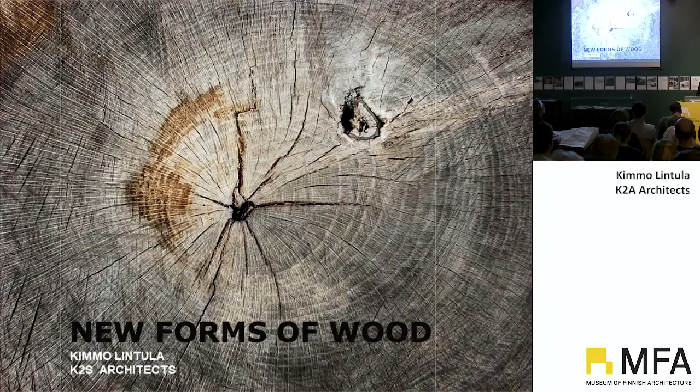I think a few words about timber itself. As we noticed or saw there, you can do pretty much amazing stuff from timber, and even deliver quite amazing spans of timber structures while using just a normal truck and a couple of other wheels. But this is just one of the benefits.

I think the big thing about timber is that it's really kind of like renewable energy in a physical form. So it's something that's grown from the sun and from the earth, and there it is, and it's really renewable. It will regrow, or it can be replaced by another tree. In that sense, I think forest is kind of like the manifestation of a green miracle, you could say. But as a material as well, it's very human.

It is kind of like one that creates memories, but also something that records memories. If you look at this kind of cross-section of an old tree trunk, you can see how it's recorded, the different years it's been growing, the different conditions of water, coldness, warmness, weather in general, the harsh winters, hot summers.

And of course it's very appealing to the eye somehow. It invites you to touch, and it reacts nicely to sound, and it's kind of softly seducing you even by its own fragrance. So there are plenty of reasons to do things in timber.

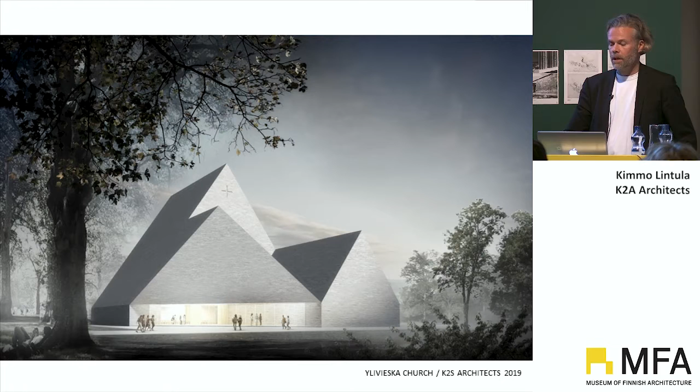So another issue here is that we wanted to return to traditional building physics, meaning that we build solid. So everything is single layered, whether it's stone—I mean brick here—but then the timber is also a single solid timber construction, mainly out of CLT, cross-laminated timber. This is to give it endurance for several hundred years, and also predictability of how the building physics really work there.

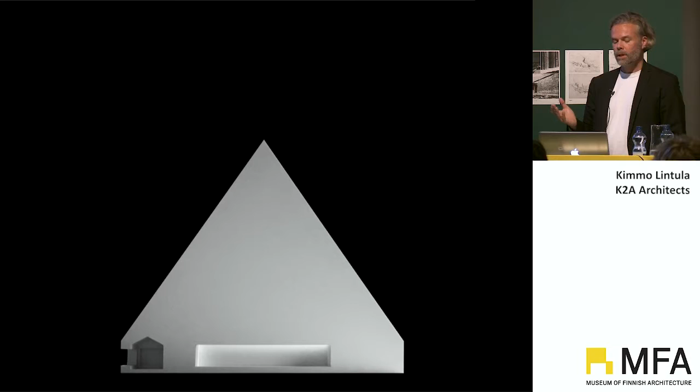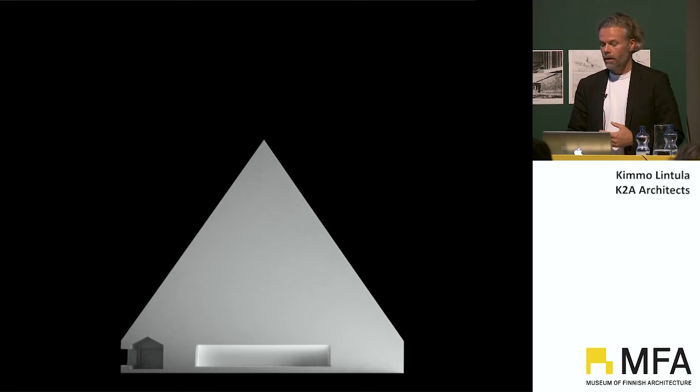But of course, architecturally, it's really inspiring that you kind of go back to the times where you can make just a very embracing mass, and then dig out some places for people to be in there. And structurally, that means it leaves it pretty much open unless you just take care of the outer surface and inner surface of the spaces. Everything behind or within the mass, as long as it is solid, is quite free of design.

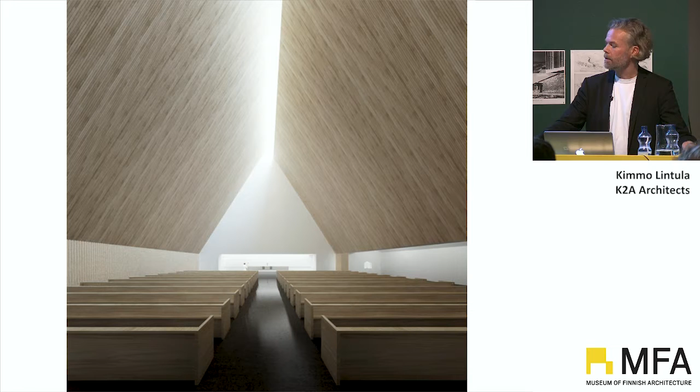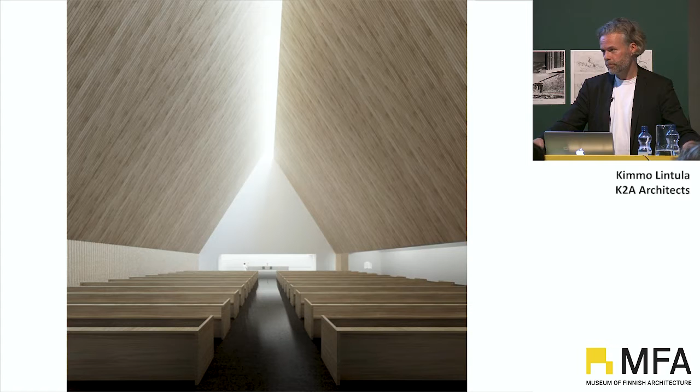But then, as you see it inside, can that be challenging, or can that be kind of complex? I think it can, in thinking of it, because if we think how it's normally done here, which it will probably be realized by, and I have a comparison of a bit more further engineered ideas, how it could be also.

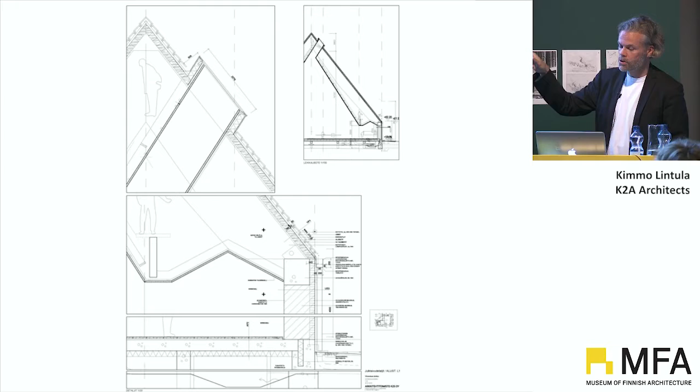This is the first time in Finland that the CLT plates are used as one unified plate in order to strengthen the structure and also take the loads and take care of the stability.

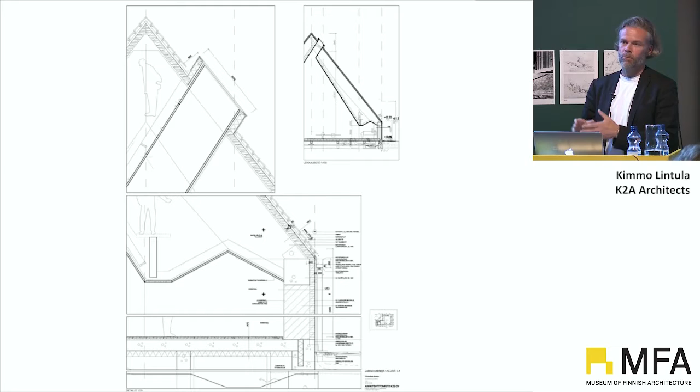But could this be taken further still? Because usually, as we were discussing before entering the hall, in Finland we are in a state of timber construction where you take care of the forces that come down with one solution, then you have another solution for reinforcement, then maybe a third solution for some other layer. So it means multiple layers, and maybe a combined selection of products, and a combined selection of engineering details, whatever.

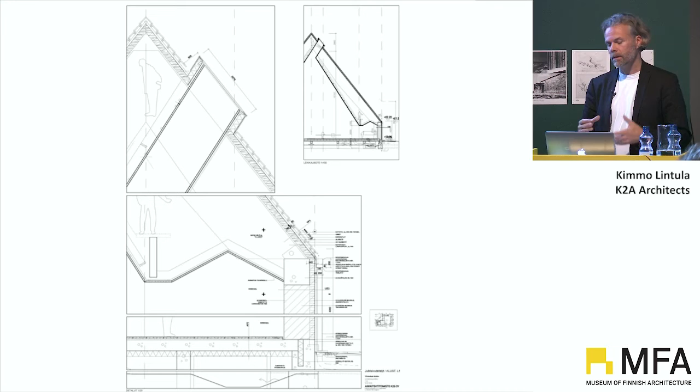So we had a chance, this was done with the ministry, to visit Switzerland for a workshop in order to create this bridge of knowledge between Finland and Switzerland, to raise our level of engineering and architectural knowledge on how timber construction could be made.

It was a really eye-opening event. We had a one-day workshop there, and then they had two weeks of workshopping by themselves, and then they came up with the concept and presented it to us. If you compare this to the traditional way, it's quite obvious there's a lot of knowledge behind how things are produced, how they can be assembled at the site, and how the loads go.

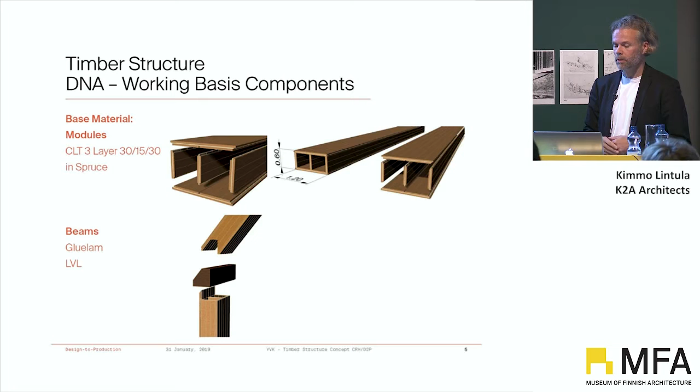So all together, it's really a multidisciplinary solution for very complex systems with a very simple solution, which is just one hollow box, a prefabricated module, which can then take care, when rightly joined, of all the loads, all the stiffness, all the movements, everything like that. And of course what you really need to know is how to do the connections and joints in order to take care of the loads.

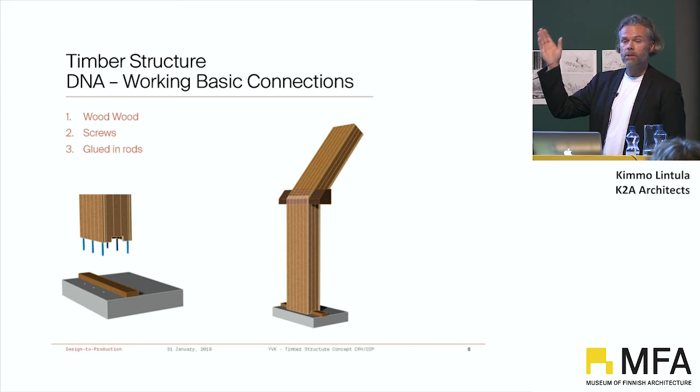But that was also handled there, and as you can see, everything is really neat, everything is really pure, everything is in line, everything is very Swiss, you could say.

This is how it looks in a section, the hollow tubes go from the roof to the walls. And if I remember right, after production, this would have taken less than a month to put up, so it's really fast as well.

So there are things we can go further on here in Finland as well. As Johannes said, this is a really nice opportunity when you can see something being done abroad, then you have the persons responsible for that, and you can exchange knowledge and be open-minded about it. So I think gradually we can reach a high-tech level of building timber construction here, which means you can have low-tech outcomes too, meaning material resources used wisely, and time used very wisely as well.

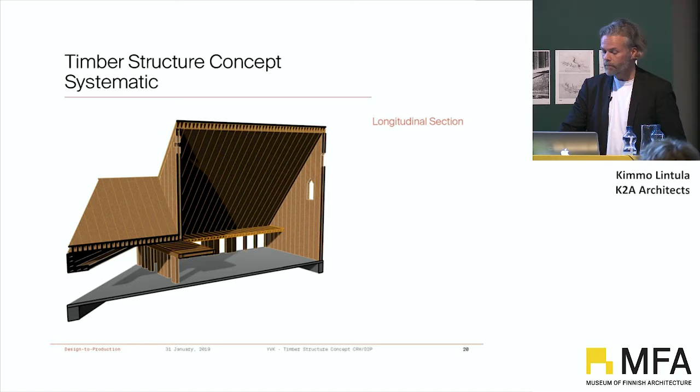Our architectural firm actually started with the Olympic Stadium canopy, and I wanted to show this because it's a very complex geometry, but it was done after a very complex process that was also quite fast, resulting in a very simple form and outcome.

This was a competition as well, and we thought about different options and went along with a form that is very flat on top, with a kind of undulating surface that always meets the corners or edges at about 40 centimeters high. So the shape is always the same from the edges.

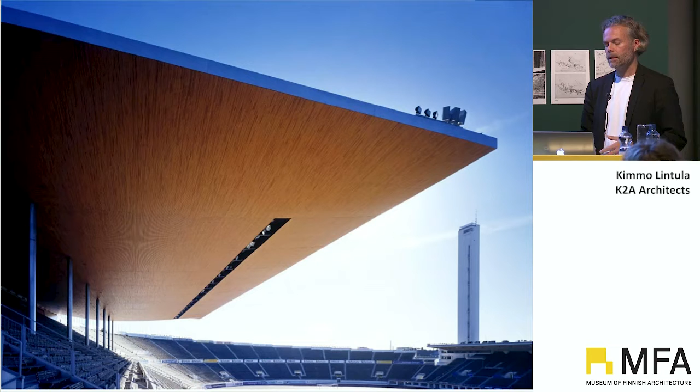Probably one key reason we won the competition was not the form itself, but that we cladded it with wood. Timber has always been part of the heritage of the Olympic Stadium through its various changes over the site's history, when it was enlarged or had temporary stands. There was a historical connection — even the benches were timber.

So what that meant was that, as we saw in the distillery as well, the main structure here was actually steel, because the spans and the possibilities of anchoring to the existing structures couldn't succeed with timber. But timber is what you see — it takes care of the cladding of the shape itself.

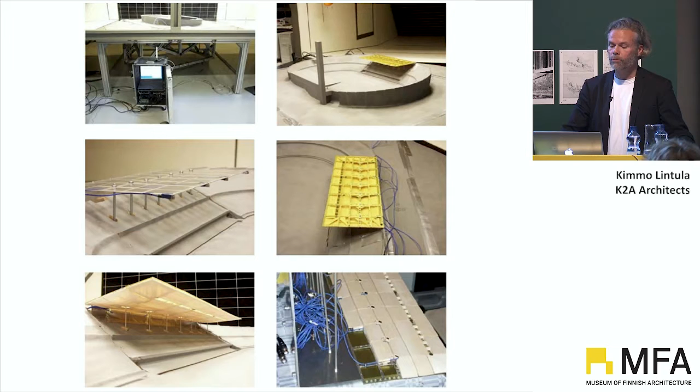We went to the wind tunnel test to find the right geometry, investigate its effect, understand the forces and structure, and then it comes down to the details.

We did a lot of one-to-one study cases, because it needed to be prefabricated, since we knew the construction time was pretty fast.

We wanted everything integrated — all the installations needed in the stadium canopy, like lighting and loudspeakers — to be part of a continuous surface without any interruption from these technical elements. This shows our tryouts and ideas for integrating them.

Scale is always important, so we considered how to create this big-scale surface out of timber while achieving certain quality. We realized it's possible with industry methods — you can use the worst possible quality of timber if you cut it into small enough pieces to remove the branches and bad parts, then use finger joints to create wood as hard and structurally tensile as solid timber.

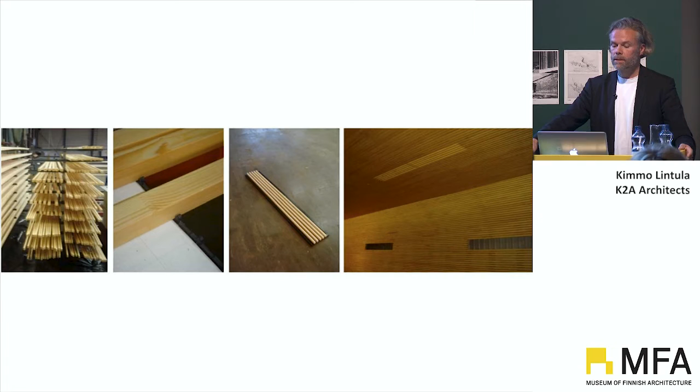We also layered this in 3 layers to maintain stability against moisture, so it doesn't twist. This was our first attempt at what we called future craftsmanship — the idea that you get the quality of craftsmanship, but it's industrially produced.

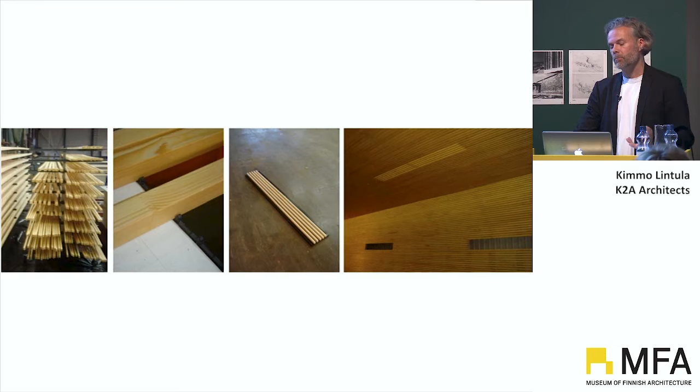Then you have to account for the width of the prefabricated pieces — here they were about 12, 12.8 meters long, with pieces roughly 1.2 to 2.4 meters. When they were put into place, it was like using canvas — even though it's heavy and very materialized, it's actually quite flexible on site because of the dimensions.

So we were able to create this unified surface which met the challenges of geometry, and this was all prefabricated. Now we're back at the crime scene, so to speak.

We are just finishing the project — the refurbishment of the Olympic Stadium should be finished next summer. It has extended in many directions, as you can see, including to the curved parts of the stands, and also on top of itself to achieve longer spans for the columns, so we won't disturb the spectators.

And then you can see the effect that in the original one, in the eastern part, there were seven columns, and now actually we can do 5 here at the south and 6 on the north, which means that the longest spans are about 36 meters. But then, of course, the structure is not the issue here, because it's again a steel structure for the same reasons, continuation of the old one.

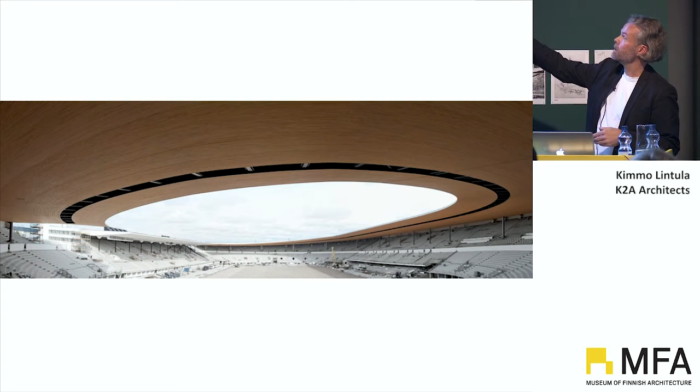So of course, one issue is where do you start? We decided that you always have to start in front, because that's the thing you can actually conceive, and you can see that those lines, if they are not working very well or they are ending next to the edge, then they are visible. So the black cut in between there, which takes care of all the installations, that was the place to hide the non-continuous strips. And then again we have another starting line in the back of that strip, and then it goes to the back of the stadium itself, where you can end it how you want, because the geometry there is changing anyways.

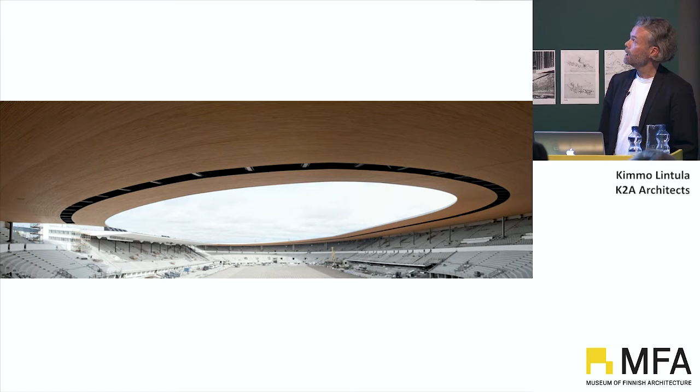But then the other issue was whether it should be prefabricated or not. We had a lot of discussions and tryouts with the prefabrication, but because there were so many geometries changing within even one prefabricated plate, it was decided that the unit we use here is a 5.5 meter long strip of this wood, and that's it.

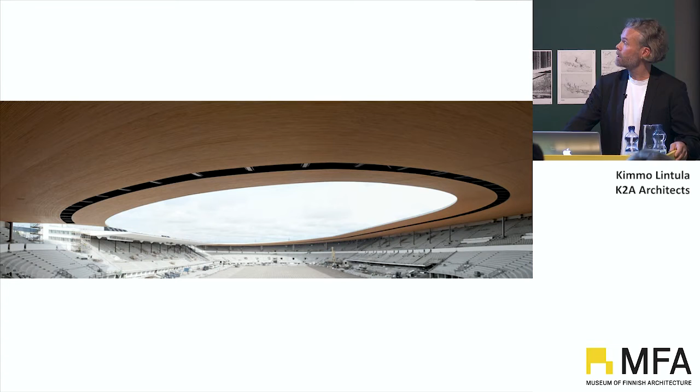But then there's another complexity here, which is that it has to take care of the fire issues. The original one was sprinkled, so there was a system for that. But then, of course, if you think about winter use and water, they don't go very well together, so the client did not want to have it sprinkled anymore. So we had to find a solution for treating the timber. One option was to paint it somehow so that it's fire resistant, but the trouble is you probably end up painting it every 5 years, maximum, mostly every second or third year.

So what we found here was that we had a series of innovation meetings where the timber production people could come to us and talk with us. And then we found this stone wood, a kind of timber which is impregnated with the ingredients of stone itself, which stay firmly in the cells of the timber, meaning it will last 50 to 100 years and won't burn. It needed a lot of processing in order to come up with that.

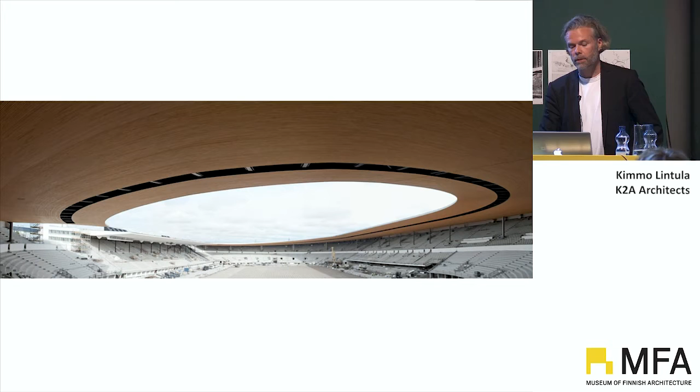And then I think what we have redone there, we've achieved an even better solution, because when it's done at the place, you only have, let's say, 5 discontinuous lines, which take care of the movements from moisture and heat. So that was a learning process for us, how to do this kind of cladding in a very abstract expression, but still technically working and being cost effective enough to be realized.

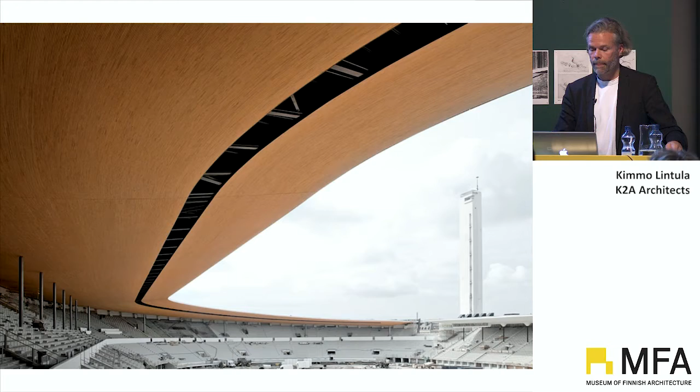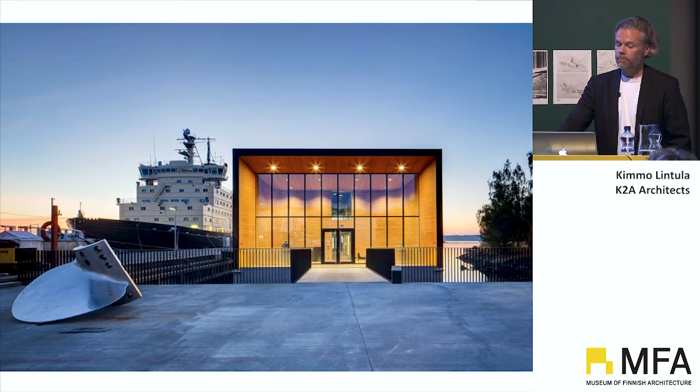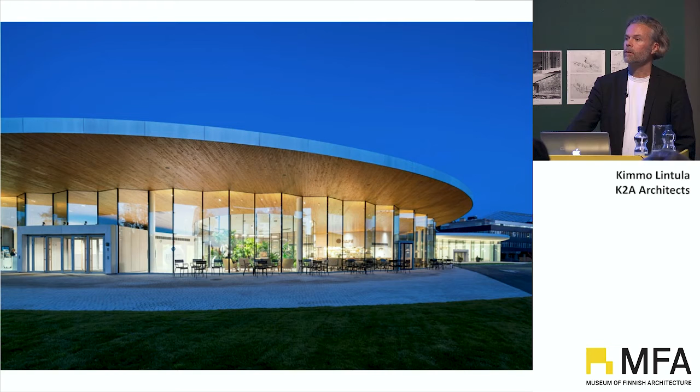Then that study line has continued on. This kind of cladding has been exposed to the shipbuilding tradition. We've used it for marking a public building for the community in Maunula, and it's also been hovering on the visitor center of Fazer. So it's been used for branding as well, but in all of these projects we've been able to use some of the knowledge, or go further with the knowledge, that we gained from the Olympic Stadium project.

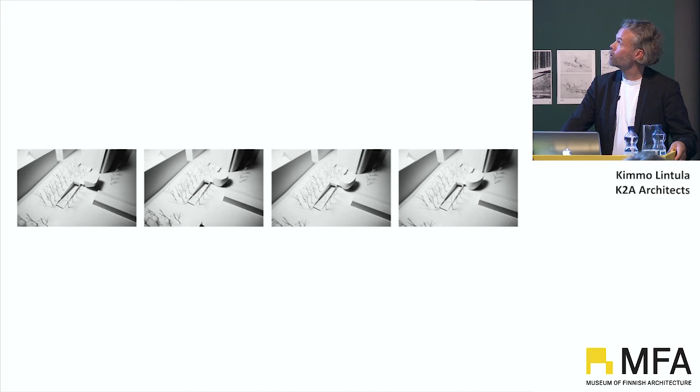Then I will take you a bit further, to a project that actually has a really complex geometry and complex content as well, which is the Kamppi Chapel.

I wanted to show you that the process started, it wasn't so clear how it will actually appear at the end. So we had a lot of tryouts with different models of different versions of geometry. It was stated by the client that it should be timber construction, a place for silence, with some meeting rooms for social workers or priests to meet, and the rest was pretty freely up to us to come up with a solution.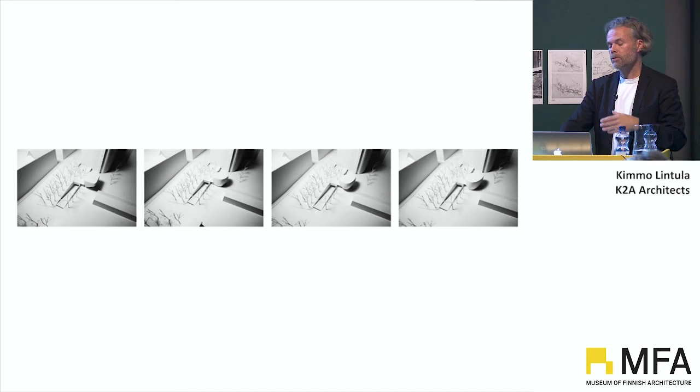The place in Kamppi is really tricky because there are height differences there, and a lot of big people flows going into the metro station, coming from the railway station. It's the most commercial place in Helsinki as well, so how to do a place for silence there was a challenge.

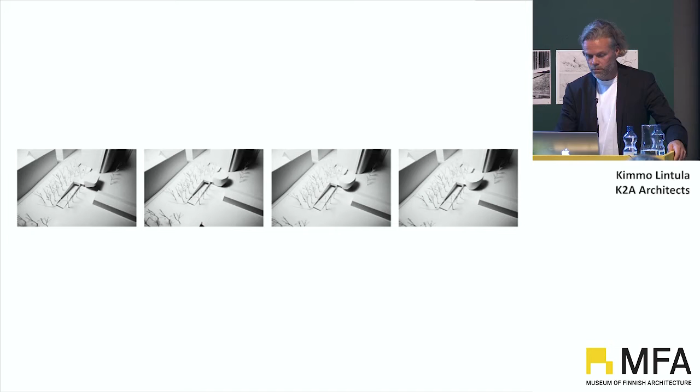We thought that we should somehow create a form that comes out of that context - a place for silence, for material and light - and that allows these people flows to pass by. It also allows the eye to pass by; you see it there, but it doesn't block your views. It was really important that we wanted to make it real wood on all the surfaces, with the abstract intention of bringing something different from what was existing there, which is of course glass and stone and metal, usually found in commercial architecture.

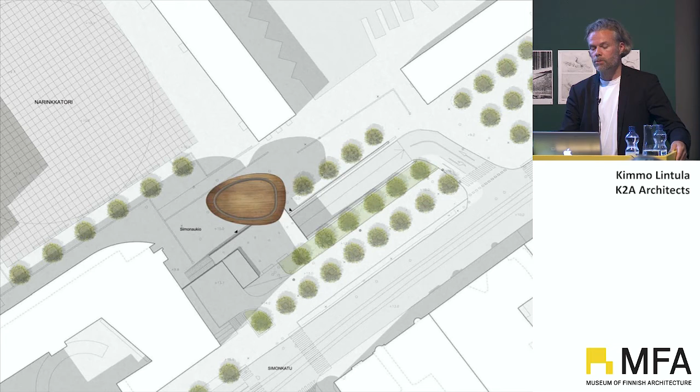It was partly built in situ, partly prefabricated, and I'll show you how. The main concept was that all the additional or service spaces we needed are put next to the ground, as a continuation of the ground or the height difference you could see there. The real thing that you see is only the chapel itself, and its form covers itself from the outdoor noise, and is visibly strong enough to withstand the weight of the very tall commercial buildings.

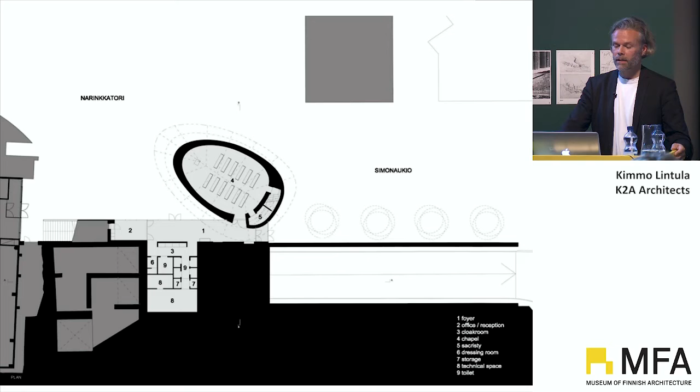This is the size of a single family house - altogether like 350 square meters. So the tricky thing was how to do that in timber and not make it look like a single family house, because that would not have fulfilled the criteria.

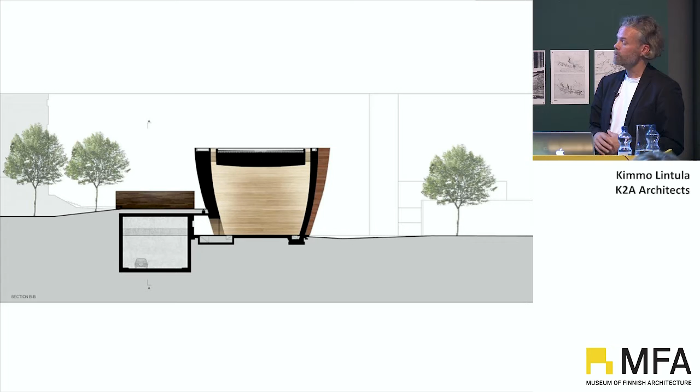The concept itself was quite clear: we needed to make a shape which covers itself from the outside noise, takes in light as much as possible, and is a place for silence where only the material is present. This section gives you the idea of that.

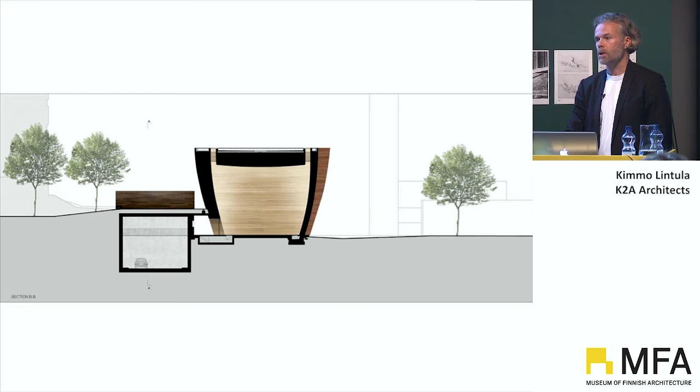All that is black in there, even with the timber construction. This is a similar situation to what we have now in the Ylivieska church - all that was a free playground for construction or engineering, figuring out how to do that.

We had several different rounds, but one important issue for us was that, since it's very small in size, the expression or impression you get from it should be really abstract. We thought it was important that you don't pay attention to one strip of timber, but to the surface, the whole form there - which meant there needed to be quite a lot of lines.

We did different scale testings, and then the next question, which will come up a bit further on, was how to make every line horizontal there. By doing these drawings we were not aware of how difficult it could actually be.

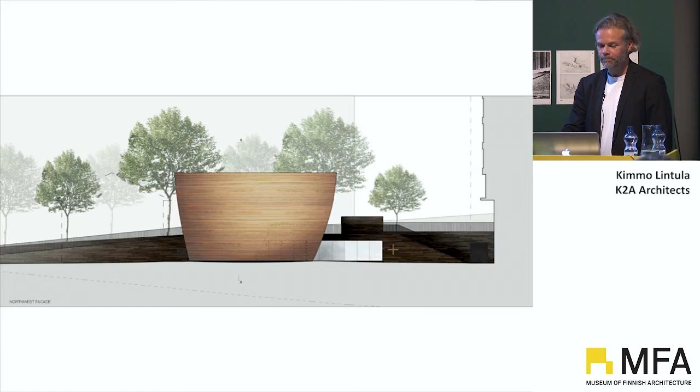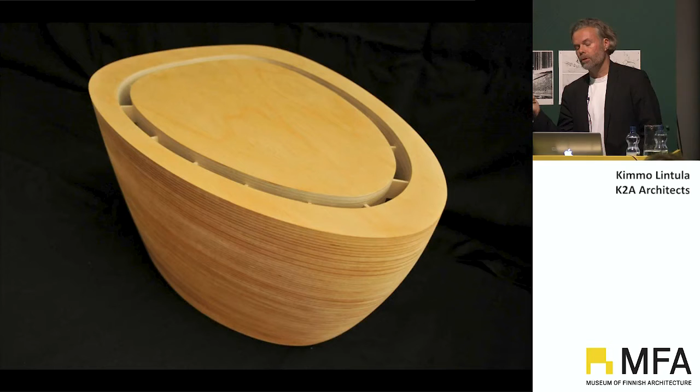We fine-tuned the shape within the context, made some changes to the orientation, and those models were at 1 to 200 scale. Then I think it was really important we jumped into the 1 to 50 scale, because that's almost the scale of actually building - the building comes out of the context.

You should never do it as a design, but there are moments where you have to detach and take the form of the building itself into an abstract idea of just the form. This 1 to 50 scale model was actually very helpful in that, because it was made out of plywood glued on top of each other, so there we could reach again the same tactileness on the texture that we wanted.

So it's always important to keep the goal present there. The lines were again important, and this showed that it's possible to have this always differently curving shape and still the lines are going straight. But also the whole shape of it, we decided for reasons like we saw there, that if you want to protect itself from water and stuff like that, it should be something that always grows and protects itself, and you can't detect those shapes without making a real model out of that.

And we redid the design based on this model with some corners. But then of course the shape itself started to reflect that, and we started to discuss how to do the cladding itself, or how to use the timber.

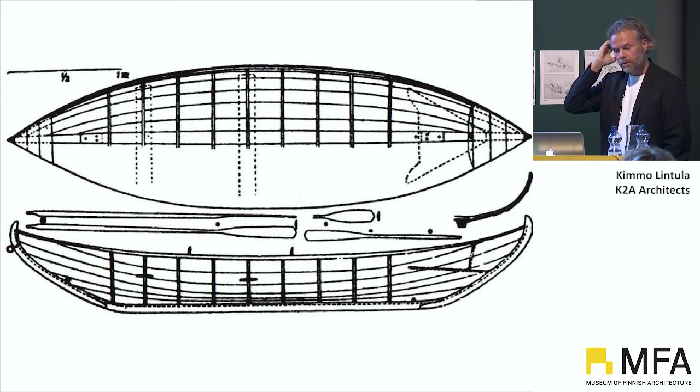And then of course we started talking with people who were either connected with the timber industry, or who were really craftsmen of timber, like carpenters. And then of course this traditional boat came up, and if you look at the layout of the traditional boat, it resembles a building.

But the part is there actually that while the lines start to follow the geometry, it means that to make that thing you have to cut each of those boards in different forms, and that we realized.

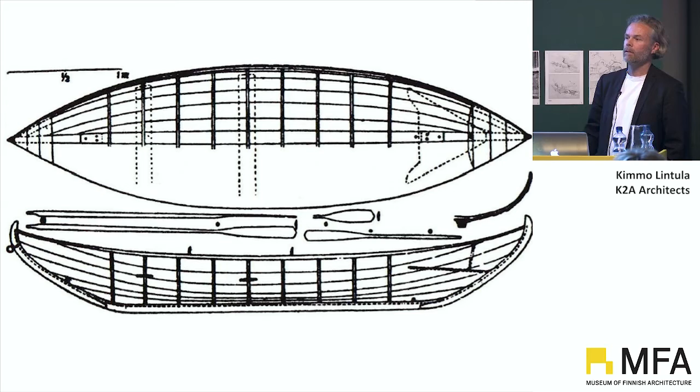And then if you think about the layers of lines we had in there, we thought that maybe the scale should be that if we use this height of timber, it means it's kind of like the single family house again, because that's the scale they use there. So we had to do something else.

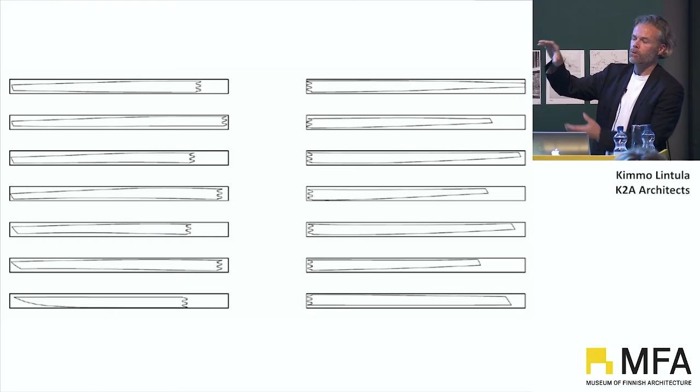So it had to be this kind of visible dimension. And then if you think of reshaping that kind of dimension, with hundreds of layers of those, we realized quite soon that this is not the way to go.

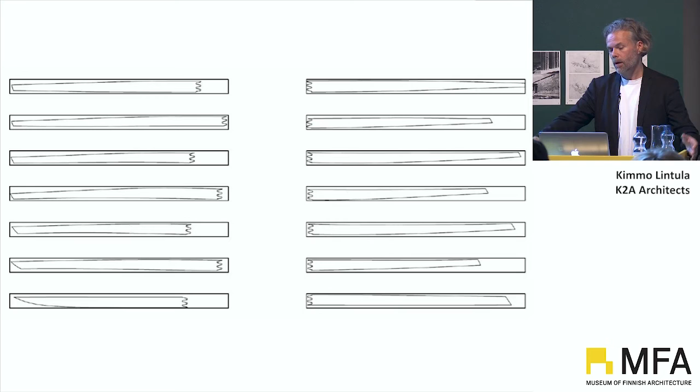What can we do? So then, as we saw earlier on, we also had some geeks in our office, luckily. This is just Greek to me, but of course I understand where it comes from, but I cannot actually make this. The next one, this I could even make maybe.

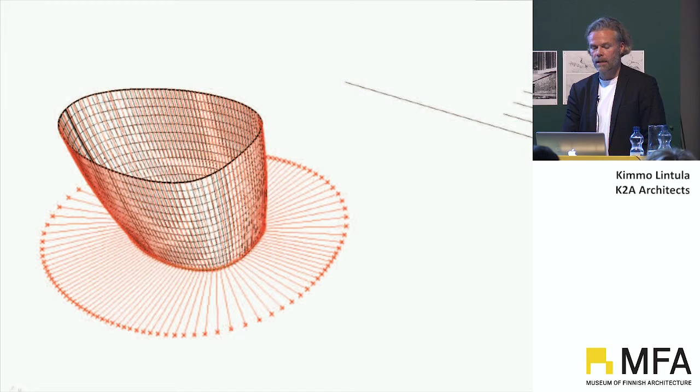But then we had this geometry in a BIM model, which was helpful in many ways, but then we had these surfaces of the inner surface and outer surface and things in between, and of course then we made this diagram of programming.

And the programming was used to cut this shape into vertical slices every 600 millimeters, because then we realized that if we don't want to reshape the horizontal lines, we have to make the vertical lines individual in order to be able to use just standardized horizontal strips.

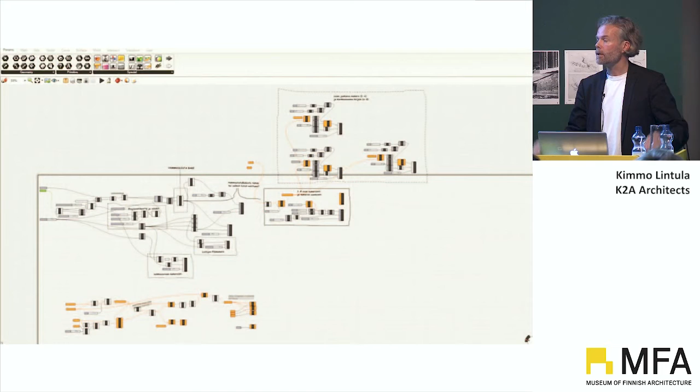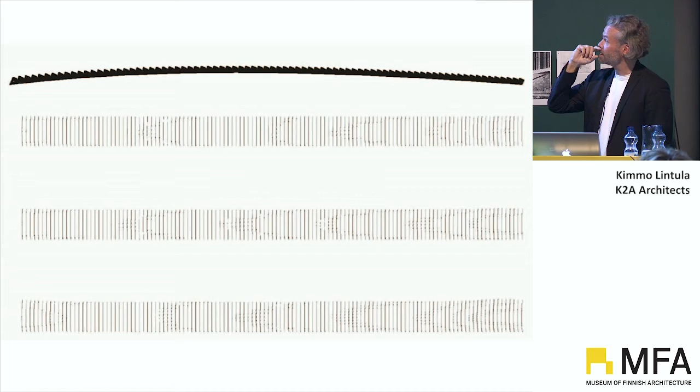So after that, this is kind of like a notation or the graphic that we got there. The idea is that each of these vertical secondary structures, which are then just used for installing the cladding, are different in their shapes, different in their radius, but also the cutouts are different because of the directions they are facing.

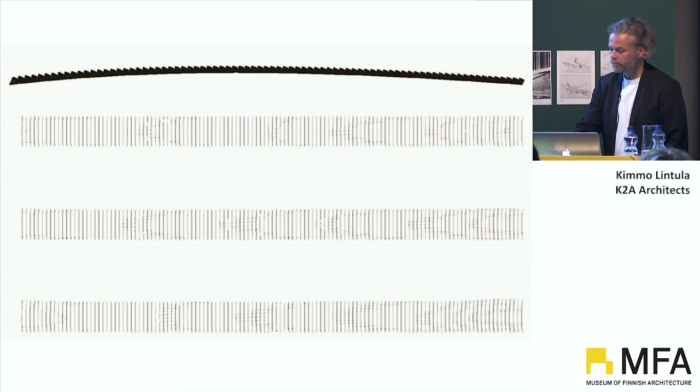So that took care of the secondary structures. Then there was the cladding still, and based on the experiment that we had early on, we very early on decided that we will go again to this three-layered glued facade material.

We think about what kind of timber can we use, whether it's spruce or pine. Then we went for spruce because it's actually pretty much moist resistant and acts better in the facades than the pine that we found out. And because it was industrially produced, we could get high quality spruce out of non-quality spruce actually.

But then there was still this issue of how to organize the cladding so that you don't have to spend half a day just thinking of how to do that and what kind of timber parts to use. So we used computer study cases, where the redder it gets, the steeper the radius is.

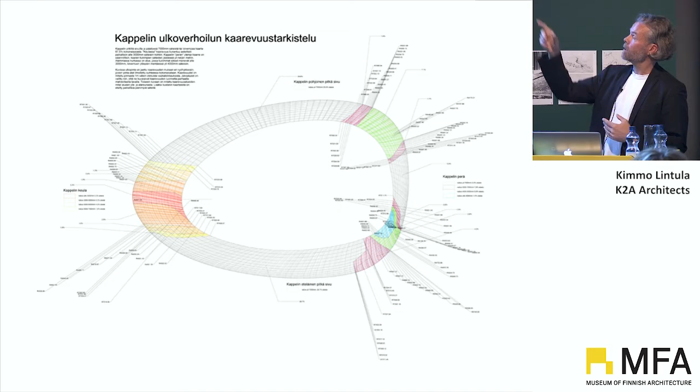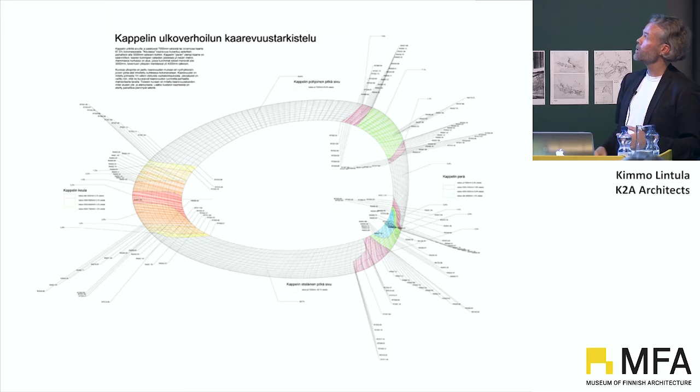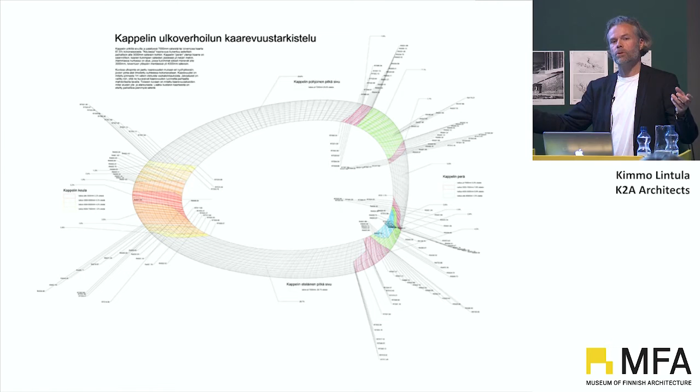Then these are easier ones where you just follow. But of course, we had learned in a stadium project that when you make them long enough, it's almost like a wire, so you can pretty much bend them in each direction. It was based on that.

Then there was still left how we should actually make the cladding itself. Here you see the section of the wall construction - it's a multi-layered construction with a different section shape to take care of the noise. That means you have a different width to the wall, so it takes out different wavelengths of sound. It works pretty well for outside noise.

But of course, while you're in a chapel, you want chapel-kind of acoustics. So you really need mass in order to get your voice echoed back, to get feedback from your own voice. That's why this massive common alder, free-floating inner core is placed there, which is the visible chapel itself. The outermost cladding behind it is like a raincoat - a very heavy raincoat used in weather-exposed buildings that could have been left exposed.

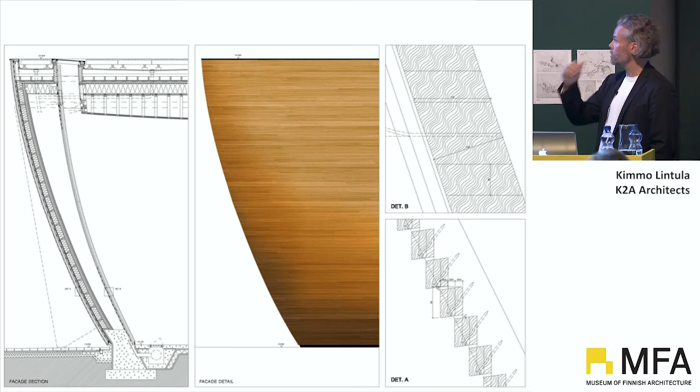But for architectural reasons, we wanted to use the cladding, and we started with the traditional cladding where you have water drops taking care of things with a small slot. But then we made one-to-one mock-ups, which I'll show you, and we realized they became too weak because the edge is very vulnerable to somebody hitting it.

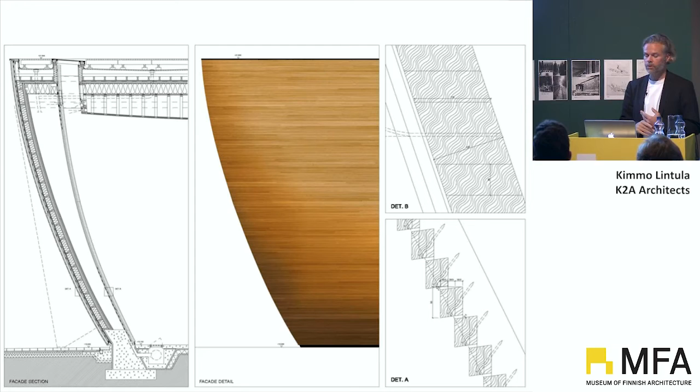So we created this shape of a twisted rectangular form in order to make sure water always drops down and it's always ventilated, which gives the best durability for the spruce cladding possible, while also taking care of the fixing so it's not exposed to the weather and not exposed to the eye.

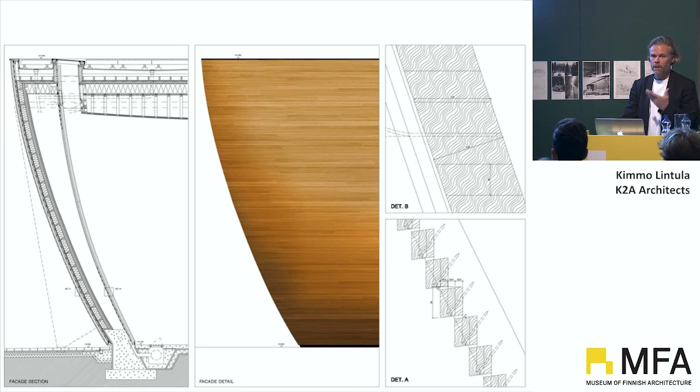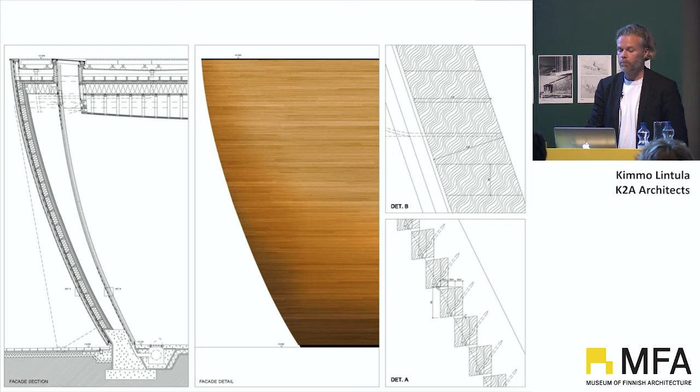There you can see the idea of using this very small scale cladding in order to make the surface the focus, not the cladding itself or the parts of the cladding. So then there were a lot of tryouts.

For the inner massive wall, there was Kari Virtanen, a very well-known and experienced carpenter. He came up with a system where if you have a piece of wood of a certain size, cut it in a curved form, and then put the flat parts together, you get the shape that we wanted.

But this was for a building program with a time of about one year. So we soon realized that if you do that, you have pretty much individual pieces put together. So what we did was a similar kind of solution, but CNC milling, which could very easily be organized by using a computer, so each of the elements, like we saw in Johannes' presentation, were numbered.

Then we did some pre-assembly and some tryouts, and it proved to be a really good thing, because when you ran your hand over it, you couldn't feel anything - it was so precise, the CNC milling.

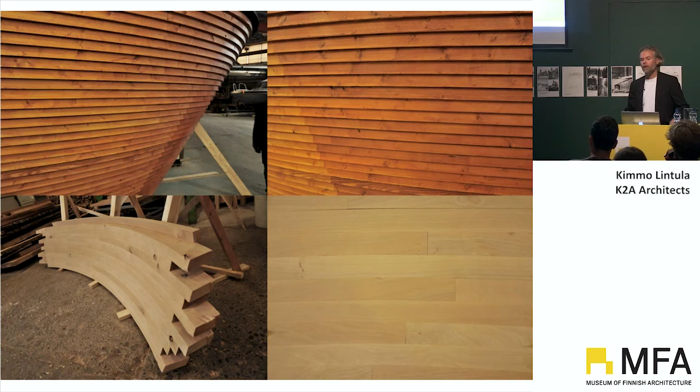The only thing to take care of was that the joints never face each other, so you have this randomly running, yet still somewhat linear, arrangement of joints in the vertical direction. It's really a massive wall.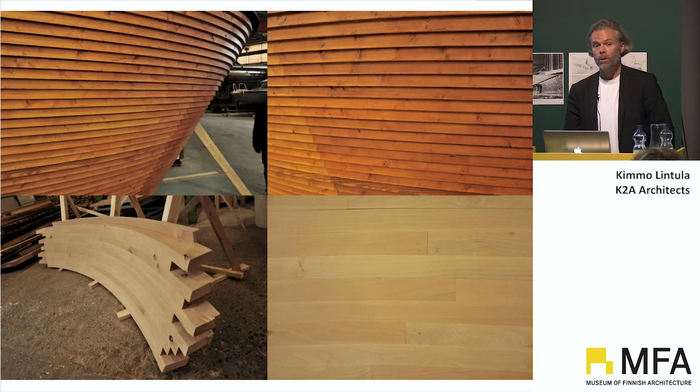When these elements, approximately this size, were brought to the place, they were numbered, and they started laying them. Each layer that was laid, then on top came the second one, using glue and some screws to make it solid. What you see is really a kind of solid, free-floating timber construction, detached from the outer core in order to give no vibrations and avoid noise.

So as a finished building, maybe some of you have visited Kamppi. It's open from 7 to 10, and it's been really popular.

One of, I think, the top 3 tourist attractions now in Helsinki. But the issue was not to make a tourist attraction. I think what's really nice is that we are now working with the Helsinki Parish Center to find some new places where you could have more meeting rooms for the social workers and for the priest, because that has been really...

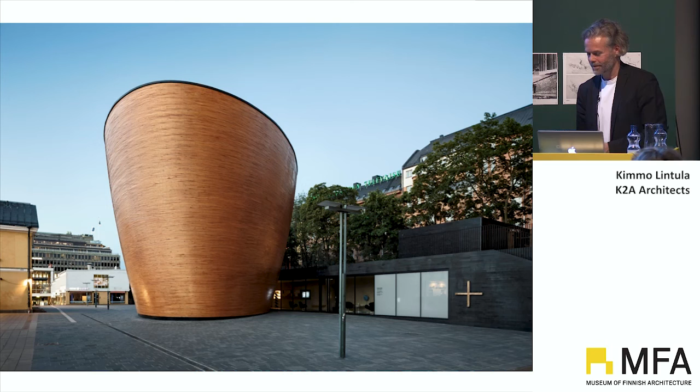She was helping me. Thanks, Siri. Maybe she heard the word Kamppi or chapel or whatever.

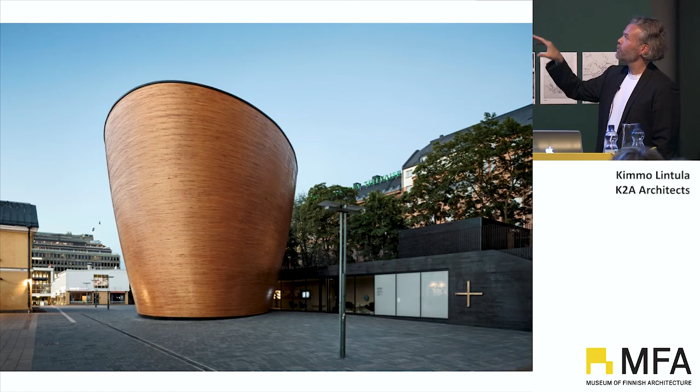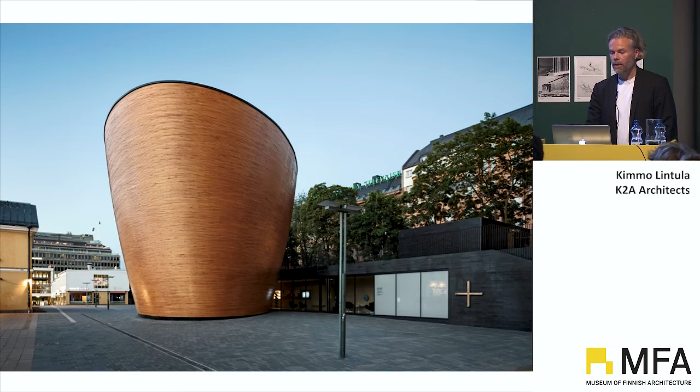Anyways, so there you see it finished, and as you see, all the supportive spaces are put back to the black wall, which is kind of an extension of the old city wall, and then you have the chapel in there. As you can see, the only thing you really see is the surface and the shape, not the single parts of it.

Then there was some experimentation done here, of course regarding the durability of this, because it's not paint covering the timber totally. As you can see, it's kind of like this—the timber shows through it, so it's not varnished, but treated in this way.

So we had a company, actually Tikkurila, who created this kind of biowax at the time, using nanotechnology as the basis of this treatment in order to give it some water resistance. And now I think it's been there since 2012, and it's still pretty intact.

There are parts which have now been getting some aging, but it's normally redoable, so it should maintain there for several hundred years, I guess.

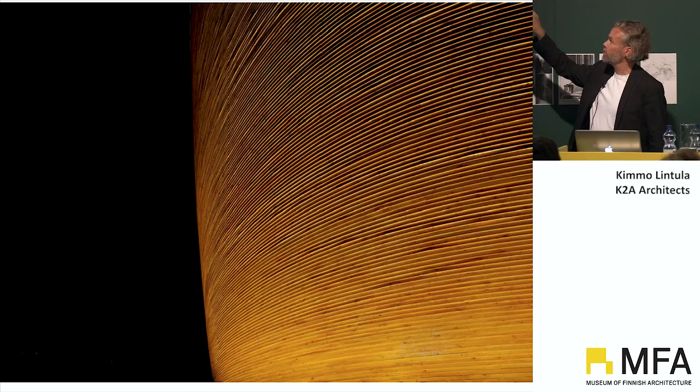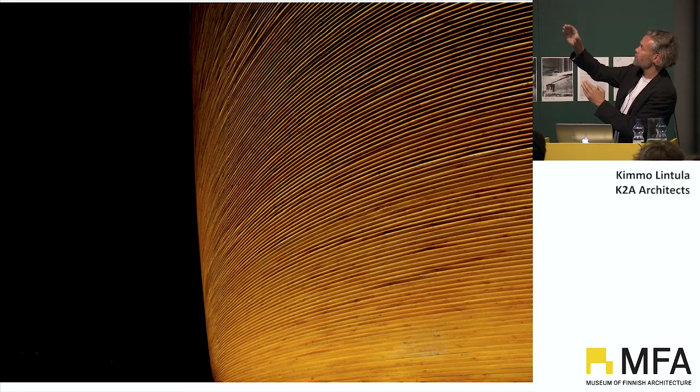Here you can see it was not only about taking the water drop down, but also to create this architectural intention of the lines, because the edge always comes on top of the other one a bit further on, so it actually creates quite sharp lines in contrast with the light.

Inside, the idea which we came up with through this kind of industrialized craftsmanship was that we really create a place where it's only material, silence and light.

Looking back now, and being in the other room before this event, I think what's really nice is that with these technologies we saw earlier, and with this Kamppi Chapel, I feel Alvar Aalto's idea, which he came up with in the Cultural House, with this one shape of brick trying to make every corner possible—he was talking about this elastic standardization.

So I think now that we have the tools for computing and the tools for production, we are pretty close to that, because it doesn't really matter how you shape those things or how you put them together in complex forms, if it's just well thought over beforehand. It means we really need to do a lot of thorough research and design, but then we can achieve pretty amazing stuff that used to be achieved only by craftsmanship earlier.